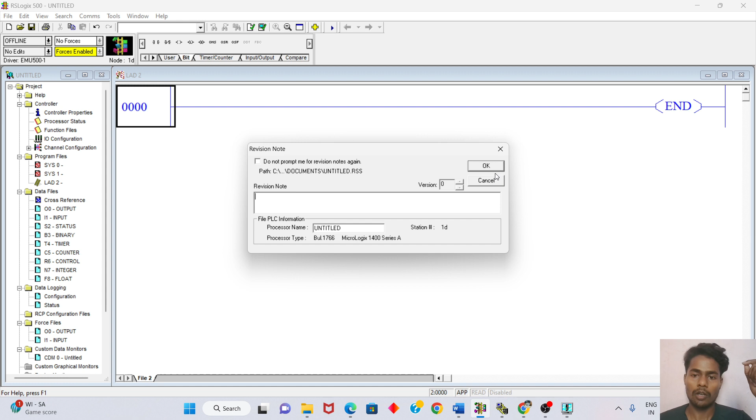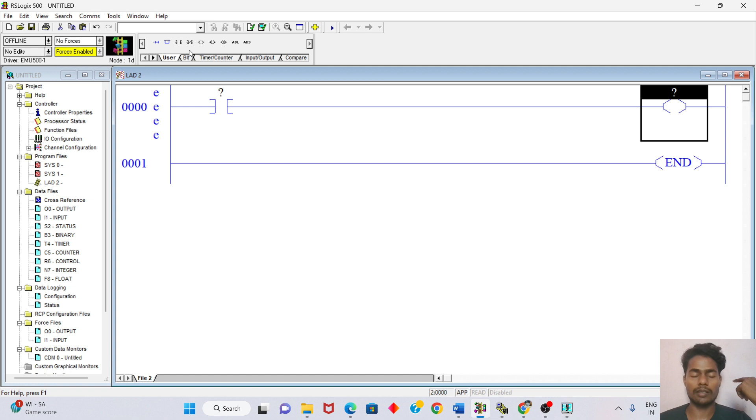From here you have to select user, and now take a new rung. Here I have to select a normally open contact, then I have to select the output. You have to select OSR from the bit instructions. In a previous video, I have discussed what bit instructions are, so go and watch that video. From bit, select OSR.

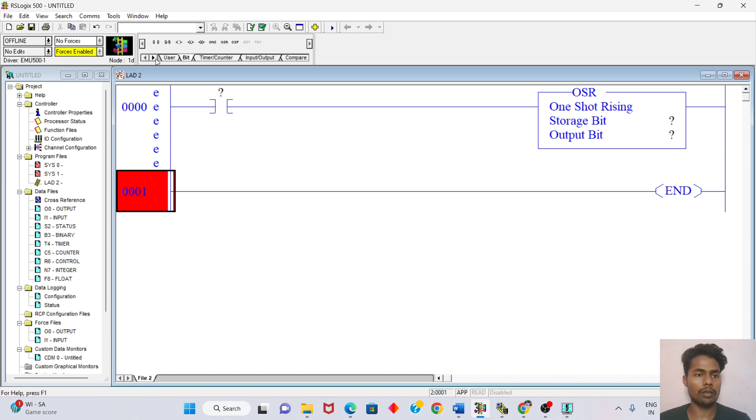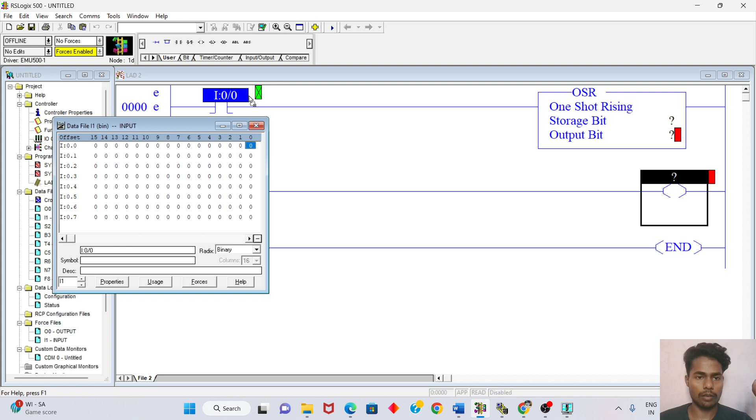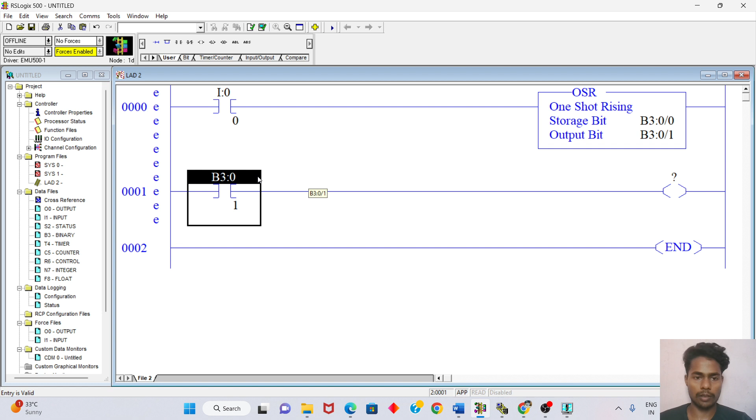From here I take one input button. And here, which type of storage bit you have to give: from binary, take binary, and then our output bit, also binary. Then I give binary one, then output addressing, O:0/0. And now, since I am discussing OSR, I press F1.

What is the full form of OSR? One shot rising, for MicroLogix 1200, 1400 and 1500. In which type of controller is OSR used? MicroLogix 1200, 1400, 1500. Now watch the block of OSR here: one shot rising, storage bit, output bit. The OSR instruction triggers an event to occur one time.

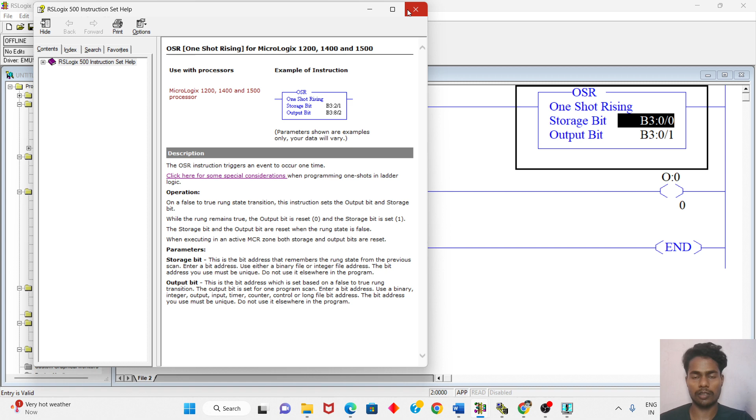In the previous minutes I told you some wrong information. So the storage bit will remember it, scan it, and send it to the output bit. So now you understand what OSR is; read its instruction help. Now I have to execute the program.

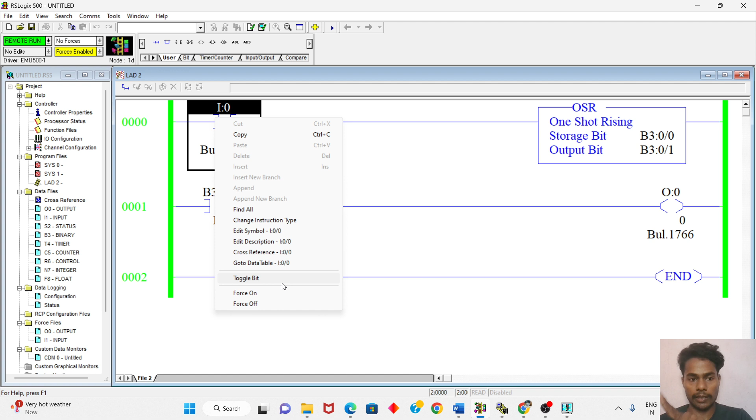So communication, download, okay. Then do you want to go online? Now here I have to click on run, and then press 1. Then I press the toggle bit, and the output will be energized. Here you have to see in the second rung. Now I have to go offline and create one more rung.

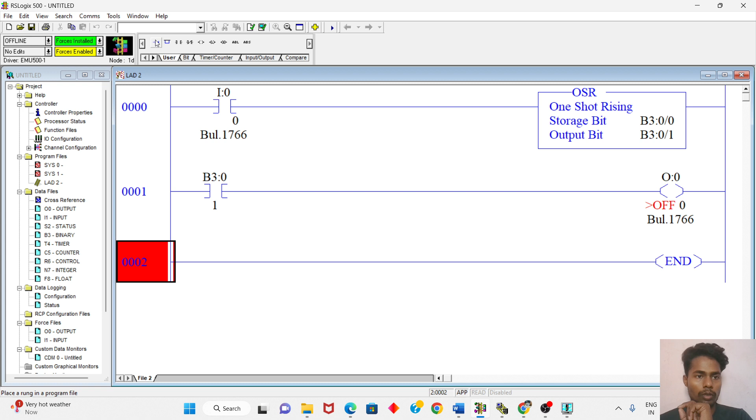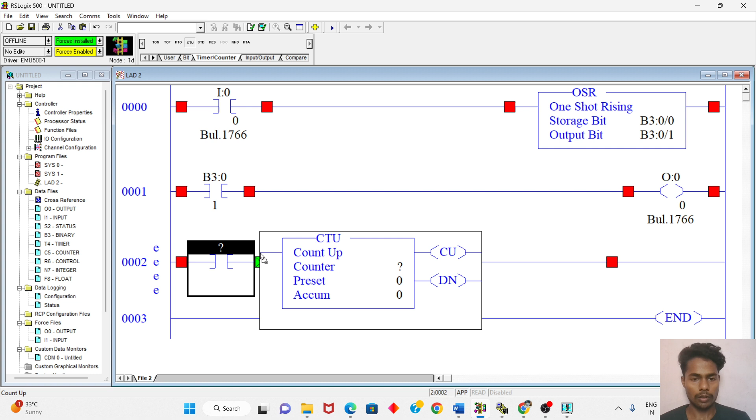Now I have to toggle it, remove force. Now I take one new rung and remove force from here. Now I take a counter. Counter, you have to understand well. Now I give its address, drag it: counter C5:0. Okay. Preset 10, accumulator 0.

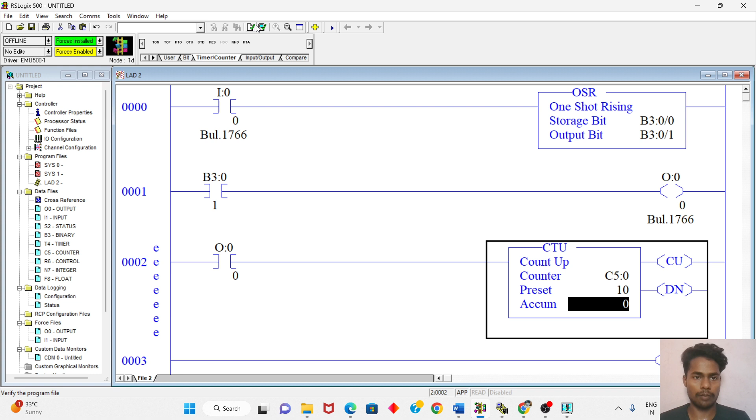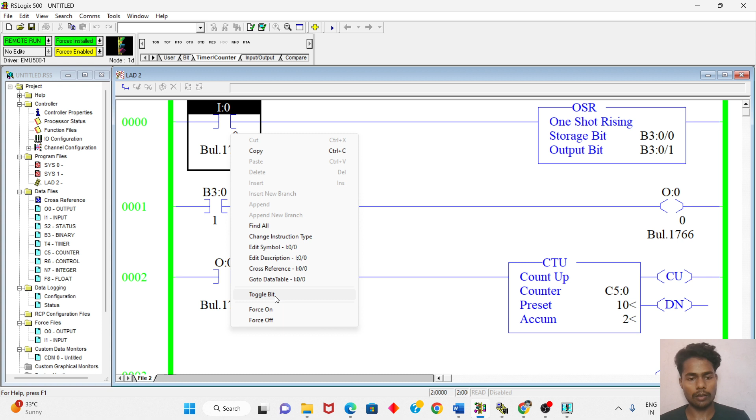Now verify project and download. Okay, yes. Remote program, run. Yes. Now you press the toggle bit, then the output will be on. Now toggle bit off. Once again, when I press the toggle bit, the count will be 2. And here you see the output. Now toggle bit off, then press toggle bit. Now it will be 3.

It will change. Now I press the toggle bit again. It will be 4. So I hope you understand what OSR is in PLC. So engineers, you have understood in a good way what the OSR instruction is in PLC.